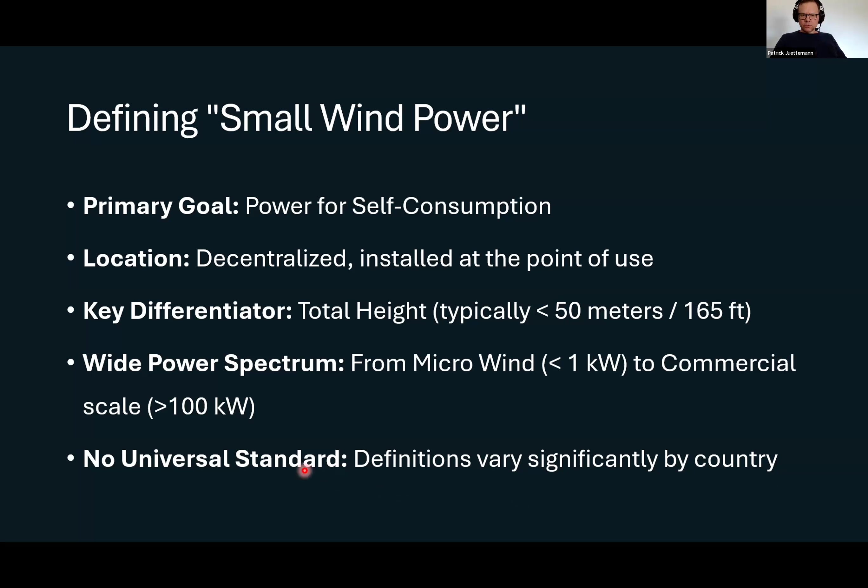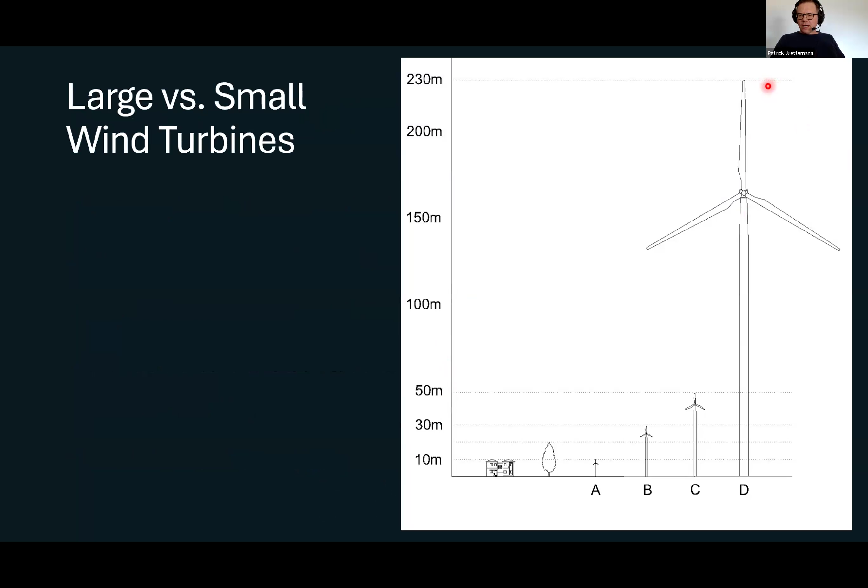So it depends on the national policies and building rules - what is a small wind turbine, a decentralized wind turbine. This illustration gives you an impression of the sizes. Here we have a modern megawatt wind turbine with a total height of 230 meters or about 700 feet. And here we have 3 small wind turbines - let's take the largest one with a height of 50 meters, and you see it seems tiny in comparison.

It's a challenging market with pitfalls, and I think it's always helpful to compare it with the solar market, because the small wind and solar market are two completely different worlds. The solar market on one side - here we have large companies worth billions. The market is consolidated. The solar cells and solar panels are mass produced in highly automated factories, which results in rather consistent quality of the products and low costs.

But on the other hand, we have the small wind market. Here, instead of a few giants, we have several hundred small and medium-sized manufacturers across the globe. They produce in smaller series, which naturally leads to higher costs per installed kilowatt power. The result is vast differences between the products - you find huge variations in technology, build quality, and storm safety. This means not every small wind turbine on the market is storm-proof, reliable, and recommended. So as a key takeaway for the buyer: beware.

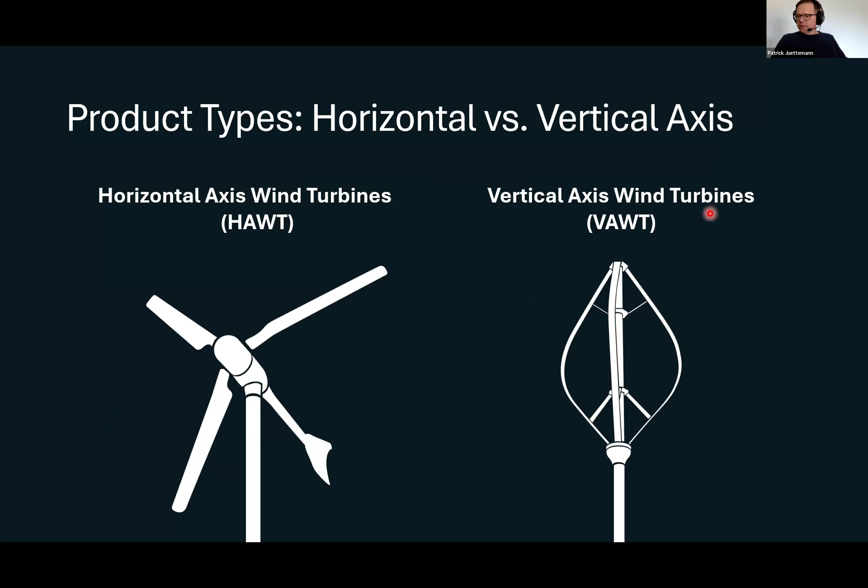Which products are those? Well, when you browse the markets, you see a lot of different designs, and most of them fall into 2 categories: horizontal axis wind turbines and vertical axis wind turbines, depending on the rotor axis.

Let's first have a look at the horizontal axis wind turbines. This is the industry standard. Here we have to say this is the most aerodynamically efficient design, they can capture most energy for a given rotor size. This is a mature, proven technology that dominates the global wind power market, both large and small wind turbines.

Then, especially in the small wind power sector, we have the vertical axis wind turbines, which is rather a niche player. They are often praised for their unique aesthetics and are often marketed as being very quiet. However, they have an aerodynamic disadvantage as one side of the rotor moves against the wind, and this limits their efficiency. So I would say, as a key takeaway, state of the art are the horizontal wind turbines.

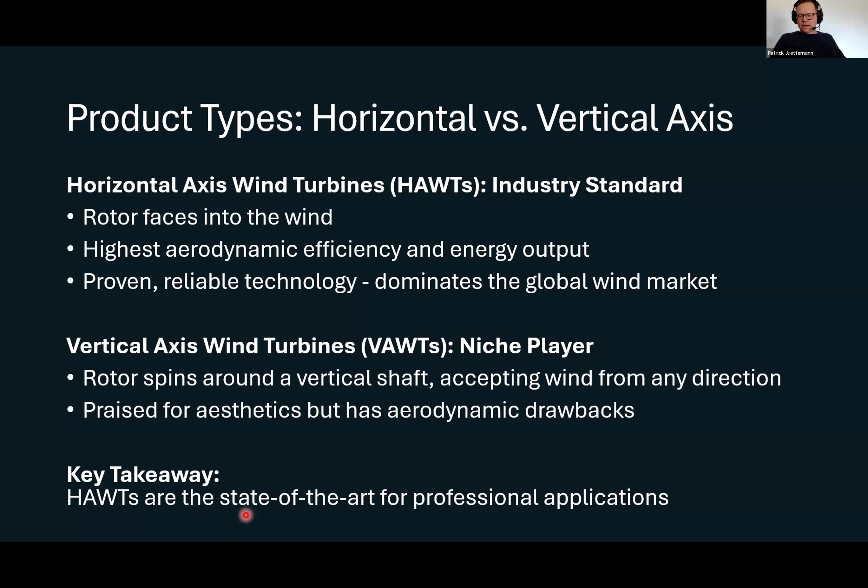When you look for a wind turbine for professional applications, now we're going to show some typical applications: a micro wind turbine, a private wind turbine, a small wind turbine, and a commercial turbine.

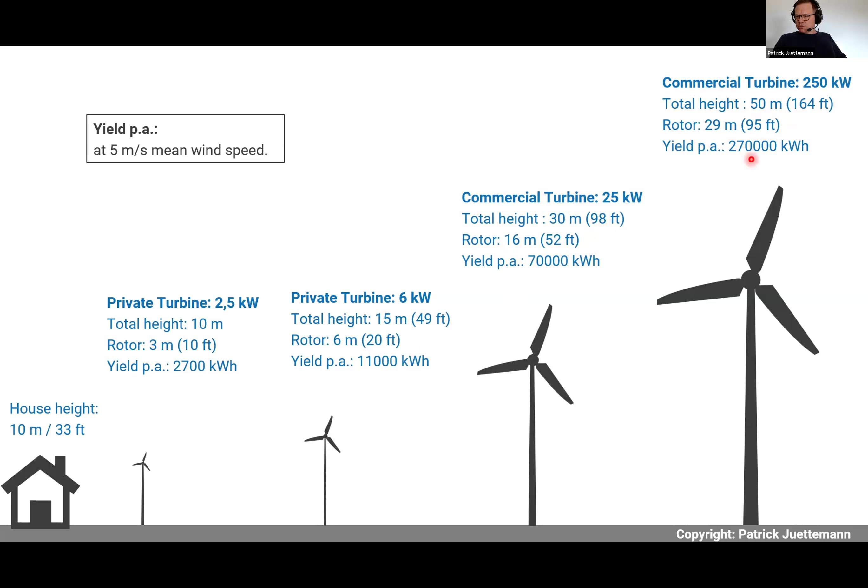So how does it work? A manufacturer startup launches a turbine with bold marketing, claiming their game-changing turbine will outperform everything else on the market. How do they look like? Most have a very unusual rotor shape. They're often vertical axis wind turbines, sometimes also for urban areas.

Then we have the problem that there's amplification on social media. You find, for instance, on YouTube, clickbait videos with sensational titles like 200% more power or 200% more efficiency, generating millions of views, but creating a completely distorted picture of the technology, as I believe.

What is the reality? I'm observing the market now for 15 years, and almost every month a new type comes on the market. But if you follow the development of those manufacturers, you see they leave the market. So the claims are not proven, so to say. And the buyers of those turbines, they had a bad investment.

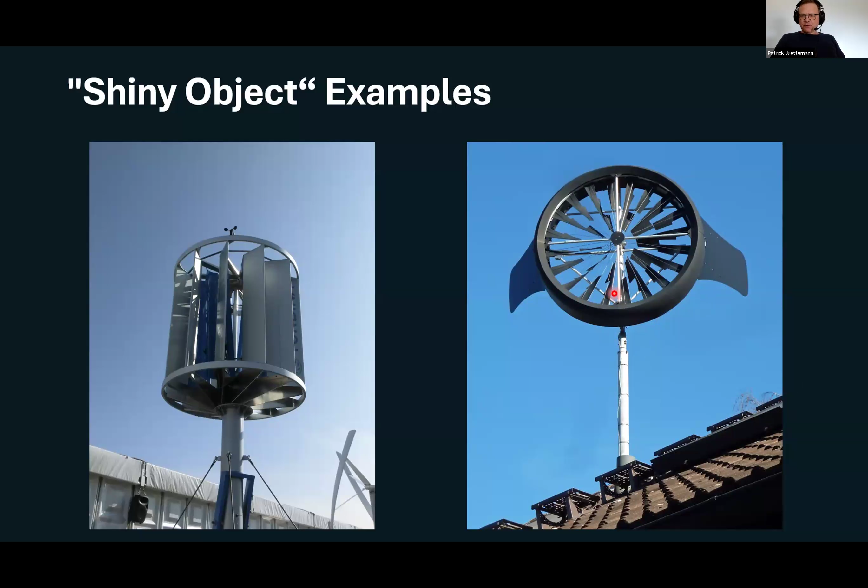So please be careful. The key takeaways are: it's a challenging market. We have many manufacturers with varying quality. Stick to proven technology - those are generally horizontal axis wind turbines. That's the industry standard. And be skeptical concerning the shiny object syndrome.

Very important: check your site first. Always assess your wind resource and be very careful in residential areas, because they are often not suitable because of low winds. And the ideal use case for on-grid small wind power are companies with high electricity consumption.

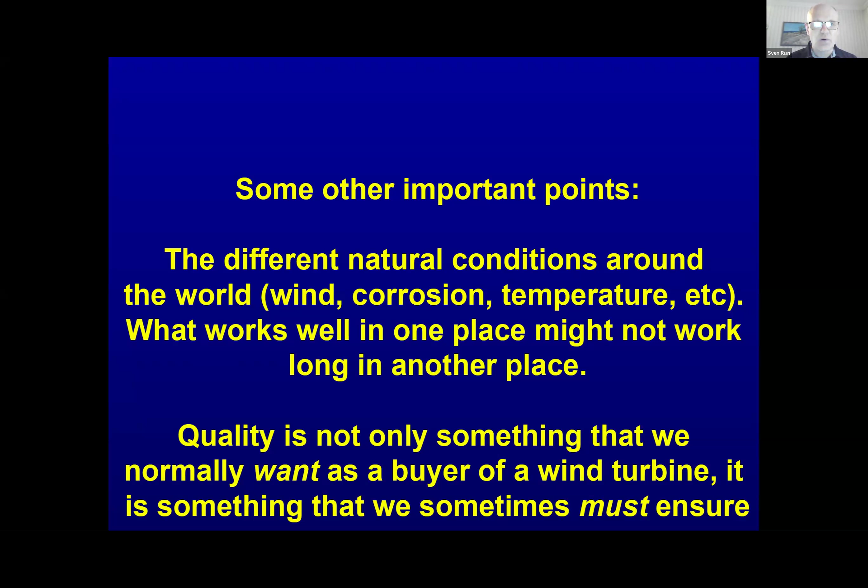The idea here is that the floor is to fulfill mandatory safety requirements. In the European Economic Area, this would include proper CE marking.

On other markets, there would be other mandatory safety requirements. The next step could be to carry out proper type testing regarding power performance and noise typically. This would be documented in a test report, and for small wind turbines, the IEA consumer label can display test results in a condensed and comparable way.

Going further, even better is if you also have third-party type certification. That means the type of wind turbine is certified by an accredited certification body to a certain standard. This involves not only some testing, but also a design review and more.

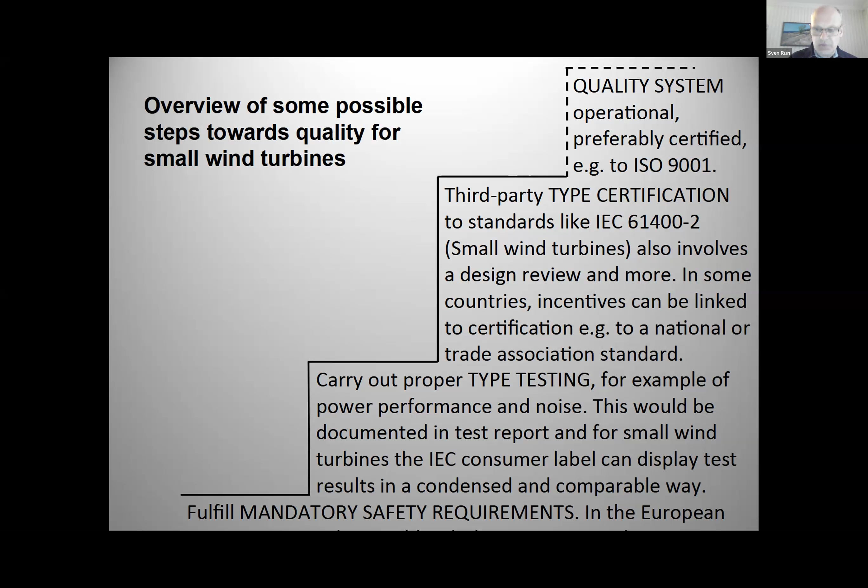And this can be linked to incentives. And then I have in this presentation added another step about quality system, because the small wind turbine industry is not quite there yet, but it would be desirable to go there, and that's to have a quality system for the manufacturing, for example.

Regarding this top step, a quality management system can define a structured way to meet expectations. For example, how to handle different versions of the product can then be described in a quality handbook. And if you're certified to this standard, the certification body will sometimes inspect that you follow your procedures for this. But as I said, we are not there yet.

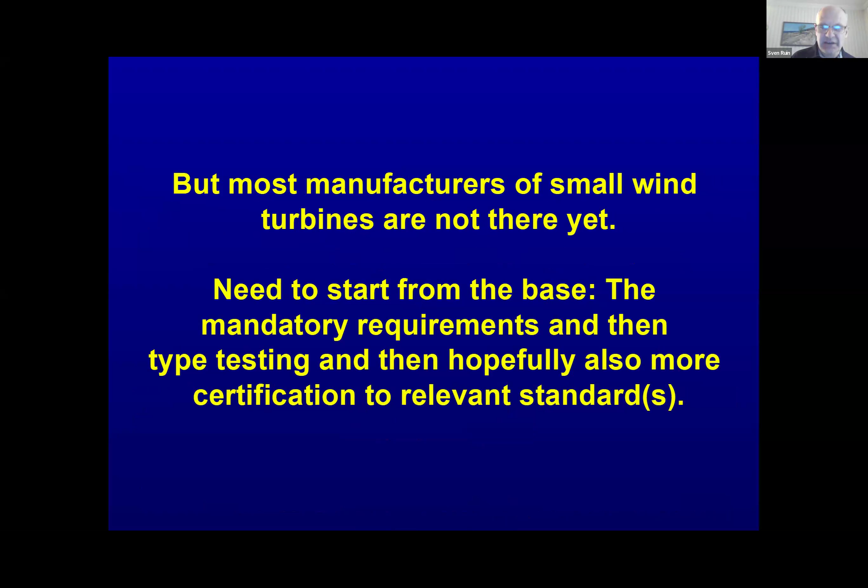So I think we need to start from the base, the mandatory requirements, and then type testing, and then hopefully also more certification to relevant standards.

This presentation uses Sweden as an example. We are part of the European Union, so most of what I say would be applicable to the EU and also other countries like Norway, which are part of the European Economic Area, using the same requirements.

Here, when you build something, the commissioner of a building project is responsible for technical workmanship and review of the design. How can this responsibility be handled? It's not practical for every buyer to start reviewing all the drawings of the manufacturer, for example.

And that's where this third-party certification by an accredited certification body comes in as a very useful tool. So if they have done this review and that is trusted, then it's a way of fulfilling this. And this is the standard procedure, I would say, for large wind turbines.

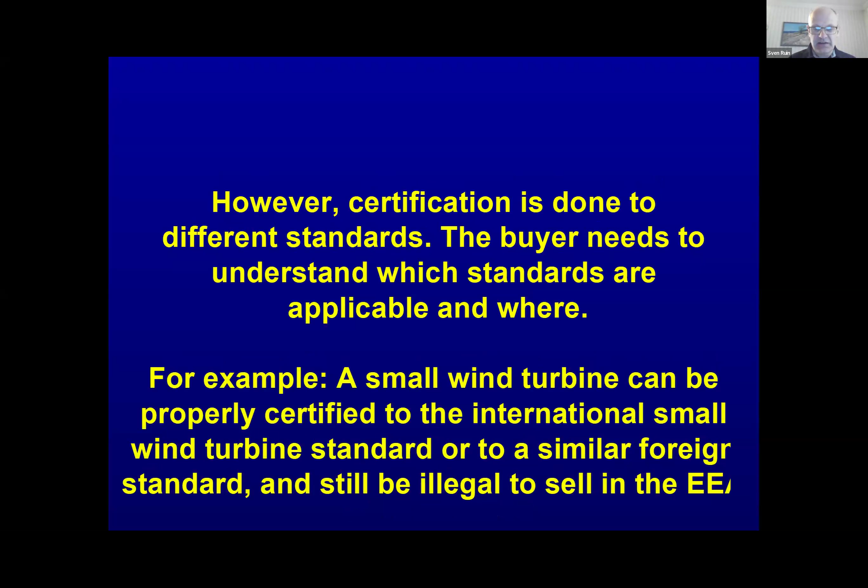However, certification is done to different standards. And therefore, we can have this strange situation that a small wind turbine can be properly certified to the International Small Wind Turbine Standard or to a similar foreign standard, and it can still be illegal to sell in the European Economic Area.

The problems that I often encounter with CE marking of small wind turbines are first, practical problems, like the braking system does not fulfill the European Machinery Directive. But also the documentation does not fulfill requirements or is not available. So you can have a great turbine which works well, but if the documentation is not there, it would still be illegal to use.

Also, please note that I'm writing CE marking. This is not normally a certification done by a certification body.

Now, there are different approaches from the industry to address these problems. The first one, which I recommend, is to fulfill the requirements. This has normally been the approach for large turbines and has worked well there. But other approaches are to ignore them, fake it, or try to change the requirements.

Coming back to the CE marking, it's a self-declaration by the manufacturer or importer. My experience is that it's difficult to do for an importer of small wind turbines unless there is strong support from the turbine manufacturer or designer. And that's not always the case.

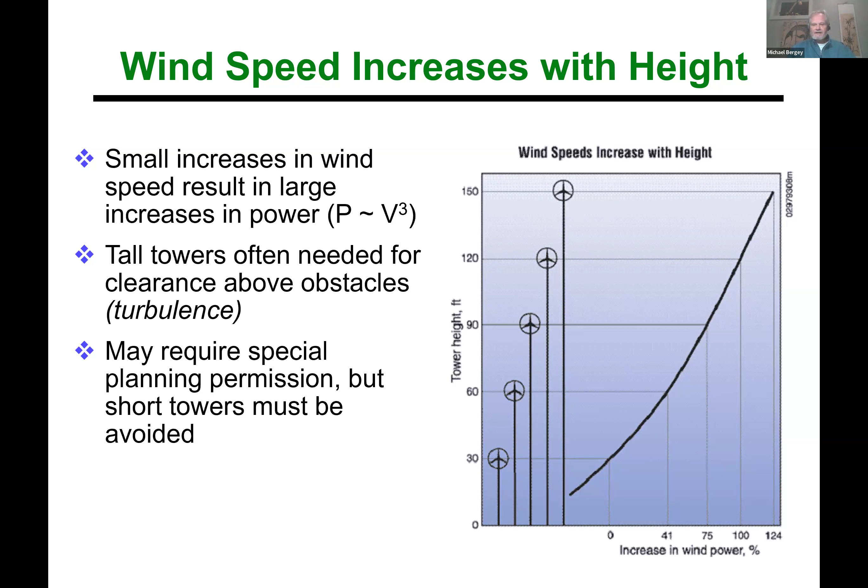I fully realize this may require special planning permission, hassles, time, investment, but it is worth the effort to make sure you put a small wind system where it can operate effectively, and that means at a proper height in most situations.

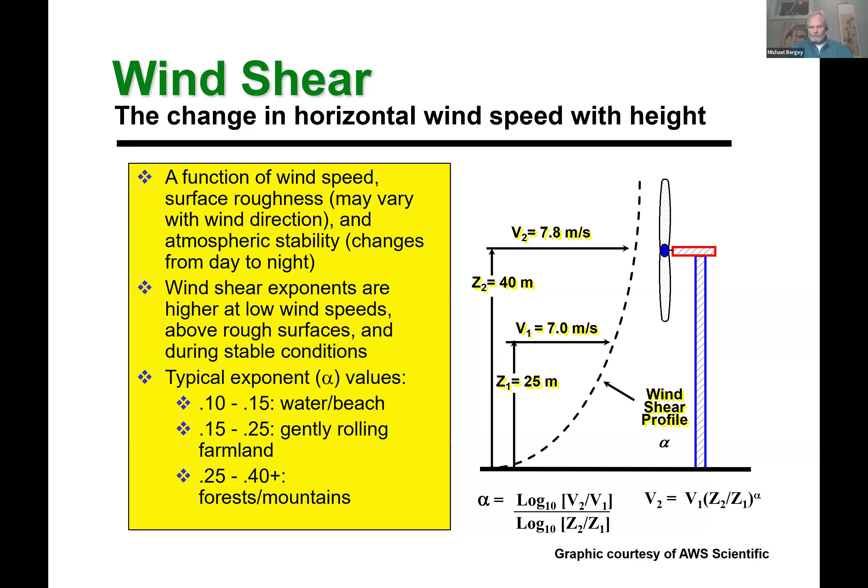There are formulas for figuring out the increase in wind speed, and therefore the power or energy available, at different heights. The math depends upon the roughness of the terrain. Wind speed increases more slowly above water, but increases very rapidly if you're in a forested area. Your dealer or manufacturer can help you understand that for your particular site and terrain.

It's very important to minimize the effects of turbulence. Turbulence is nothing more than rough air—if you fly on an airplane and the fasten seatbelt sign comes on because you're being shaken and jostled, that's turbulence. Just like it shakes the airplane, it shakes the wind turbine, and it also affects the aerodynamics, reducing performance and increasing wear and tear.

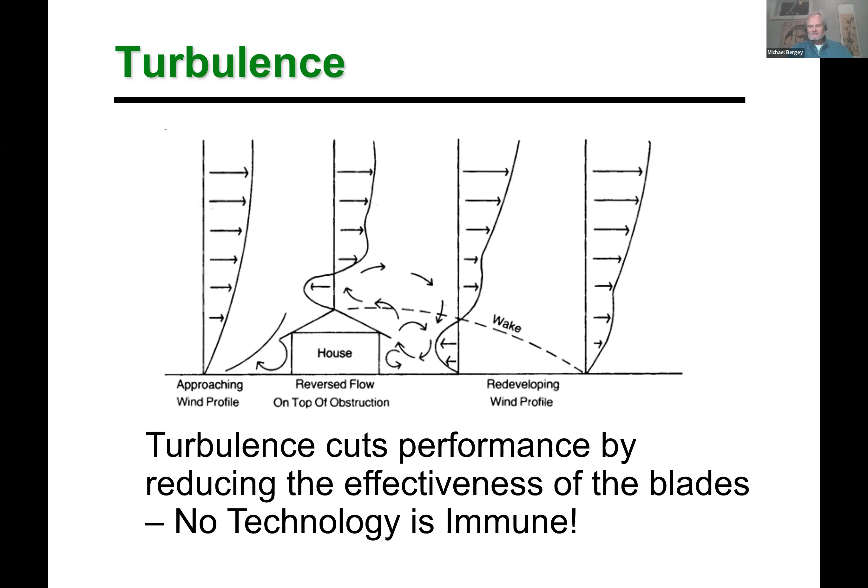In spite of some claims you may see on the internet, there is no technology that is immune from the effects of turbulence. If a wind turbine manufacturer says it's great for turbulence, go another way.

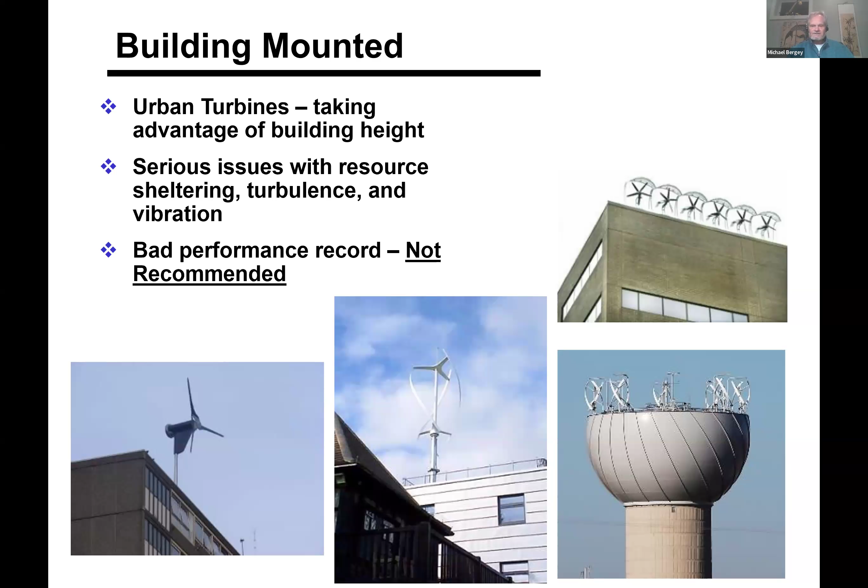There have been a lot of building-mounted small wind turbine projects, particularly in the UK and other parts of Europe, and also here in America. But these have all suffered from serious issues with poor performance, noise, and vibration. It is just not recommended—just don't do it—that's the lesson from hundreds of installations that have not done well.

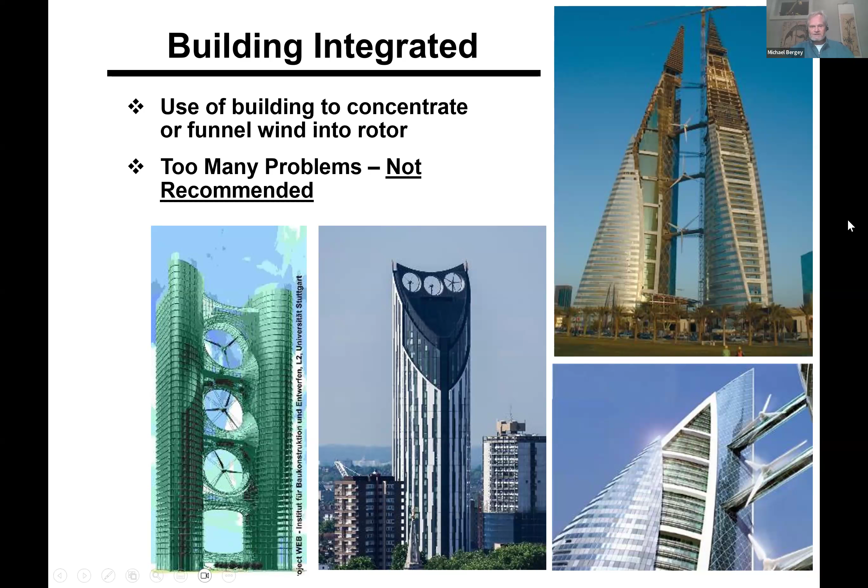Even worse is to consider a building-integrated wind system. This is an architect's wild dream—a very bad one—that should be avoided at all costs. At Bergey Windpower, we've turned down dozens of architectural firms that wanted to put our wind turbines on buildings or integrated with buildings, including the replacement of the World Trade Center in New York City. We turned down Arup, a major architectural consulting firm, because it was just such a bad idea, and fortunately we convinced them not to do it.

The takeaway I'd like you to believe is that if you're going to put a wind turbine in an urban area, you're going to suffer such bad performance that you really don't want to even measure the energy. You can do it for aesthetic reasons, for branding, that sort of thing, but you're not going to get any decent performance. So if you're going to put a wind turbine in an urban area, do it for the looks, not the energy.

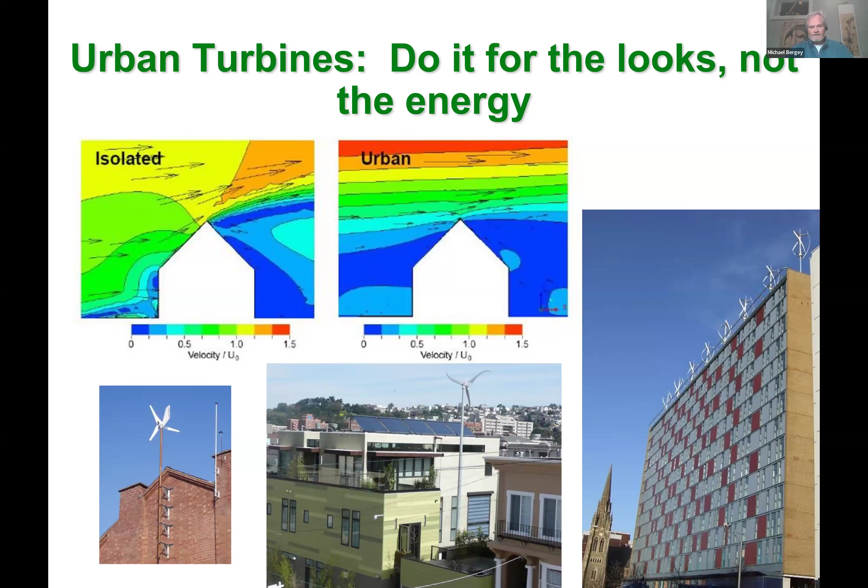So what about towers for small turbines? Here's an important way of thinking about it. If you put a wind turbine on a tower that is too short, it is the same thing as mounting a solar module in the shade. It's just not good engineering practice. You won't be benefiting yourself or that machine by putting it on a short tower in a turbulent area.

So we recommend, based upon thousands of installations all over the world, the tower should be at least 18 meters or 60 feet. Now, I understand that it's common practice in places like the UK to put turbines on 15-meter towers because that's easier to get planning permission for. But it's just not good practice, and we think it's worth the effort to get a proper height tower.

If you've got trees, you're going to need taller towers, because the tree blocks the wind and creates turbulence, and buildings do the same, so you need to be above those. Taller towers do cost more, but they nearly always lower life cycle costs because the wind turbine performance is better. There's less maintenance because there's less wear and tear due to lower turbulence, and you get a longer operating life. So please don't use short towers.

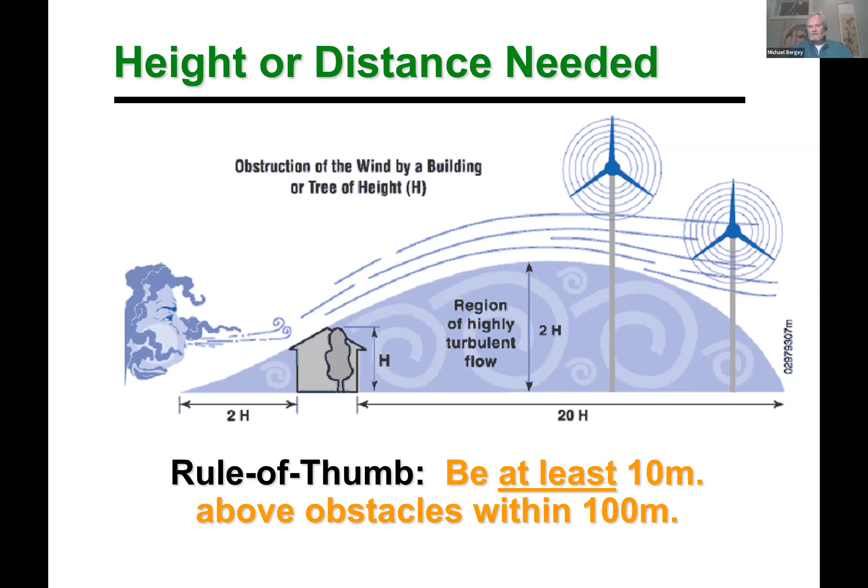What's the rule of thumb? There's no exact science. You can't see air, so you can't really measure turbulence. You can't tell where it's particularly bad. And of course, it varies with wind speed and wind direction. So the industry has found reasonable success in using a simple rule of thumb: the center line of the rotor should be at least 10 meters above any obstacles within 100 meters. You want to pay particular attention to the prevailing wind direction. So if you're, say, coastal and you have an inland-outland wind flow, make sure that the obstacles in those directions are the ones you're paying attention to.

And with that, that's how you site a wind turbine for full effectiveness. I'll be happy to answer any questions when we get to the Q&A period. Thank you very much.

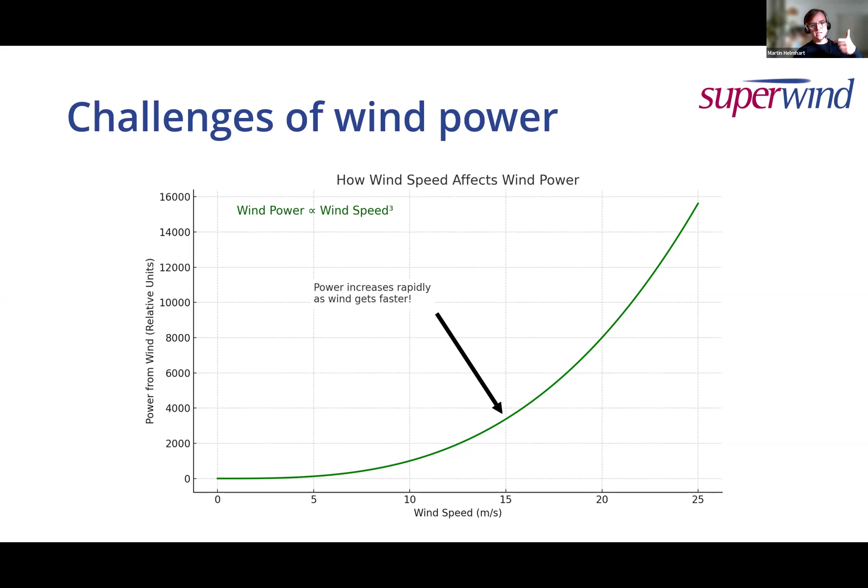As Patrick Jüttemann mentioned, it's a challenging market, so that's why we moved to niche markets where the climatic or weather conditions are really demanding - high winds, turbulent winds, cold temperatures. This is where our Superwind turbines do their job, mainly because of the design features we developed.

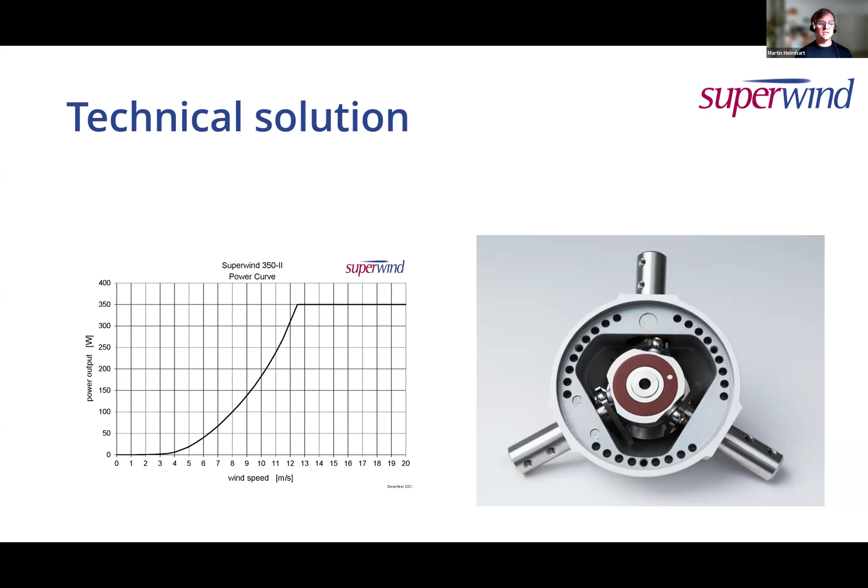So we have our wind turbines. They come with an integrated rotor blade pitch control, like the big wind turbines. That means when there's a lot of wind, they change their angle passively, so no external control is needed. This way we can keep the rotational speed steady, keeping stress on the structures low and ensuring energy production even under stormy conditions.

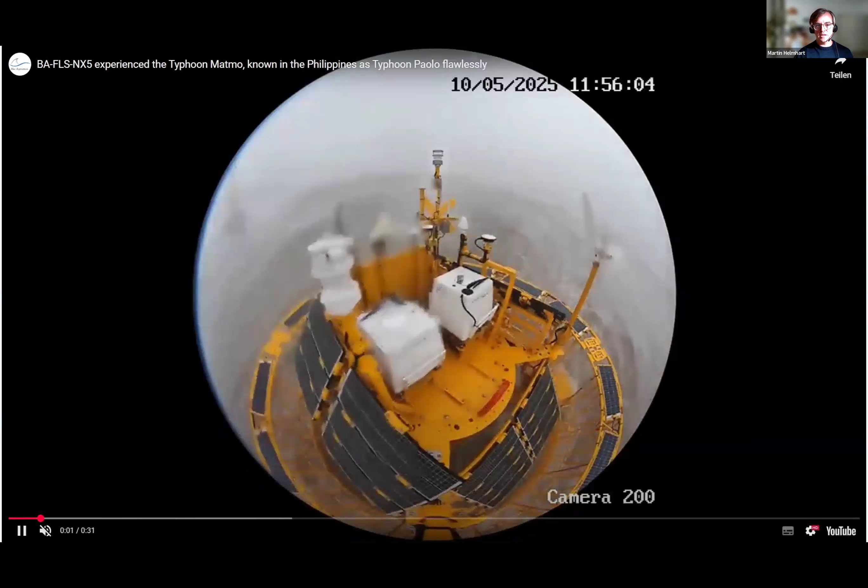One of these applications, which is pretty exciting for us, is measuring buoys in the open ocean. This is Typhoon Matmo from this year in Southeast Asia. These kinds of buoys are out in the ocean all year. They encounter water and wave impacts, as you just saw. They suffer extremely high winds, in this case up to 170 kilometers per hour, along with a salty atmosphere and water impacts.

So when we look at the markets and the growth and where it comes from, we're all aware about that. Despite the latest developments, particularly in America, there is a push for CO2 neutrality, and that is the best estimate driving incremental investment for the next 25 years of around 40 trillion. In that area, when you look at where we sit combined with the other energy forms beyond wind, the microgrid systems represent around 12 to 15 trillion.

And that's where we come in and help to solve the problem with micro wind combined with hybrid energy, so we get energy independence, security, and we use the existing infrastructure.

On that note, I would like to address the actual addressable market for mini wind turbines combined with solar and battery, estimated at around 200 to 300 billion in this period of time, growing at around 8 to 10%. So the key drivers are off-grid reliability, infrastructure, independence and security.

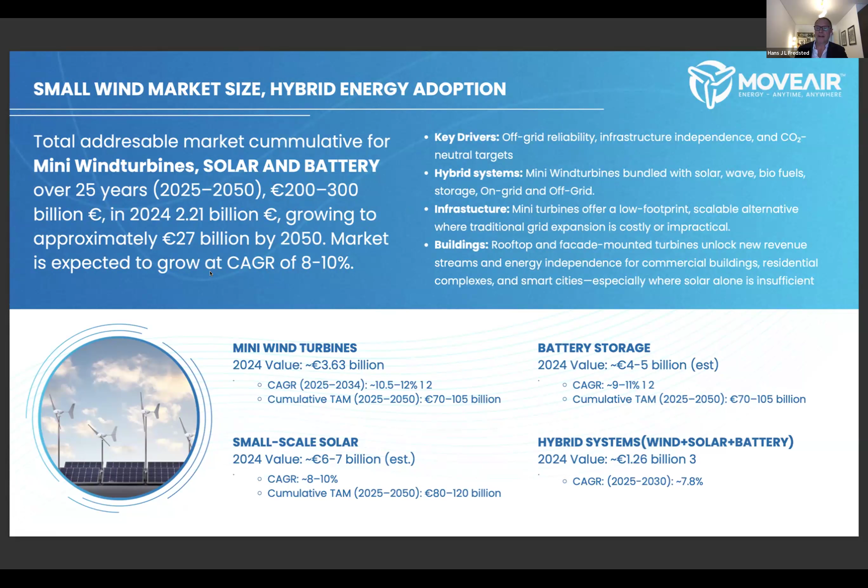With hybrid systems, you go far beyond a singular wind turbine approach to grow the markets. That's also where, with mini wind turbines, we will increase our footprint and be able to scale globally. There were early on some discussions about where you can mount and integrate and which infrastructure you can use. Yes, for sure there are challenges, but if you focus on the areas with micro turbines from 500 watt up to 2000 watt, it is feasible and manageable, and also successful in delivering good yields.

This is indeed the challenge for this industry, and has been over the years. I was told by Stefan from the World Wind Energy Association that back in 2008 at the Wind Husum Fair, there were around 14 small wind representatives there, and on top of that there were a lot of topics on the agenda and keynote speakers around small wind. Today, in 2025, there was actually only one, which was us. So what has happened with the industry? There have been a lot of cowboys out there flooding the market, as was discussed earlier, showing products that actually do not deliver, and that lack of quality, standardization and mass production is a major challenge for the industry.

On the other hand, this is also our opportunity. So that's why we need to collectively build engineering standards for approvals to get on the market in a way that will actually increase the quality, and furthermore work together on automation and standardization of production at mass scale, so we have the quality that can enable us to grow globally.

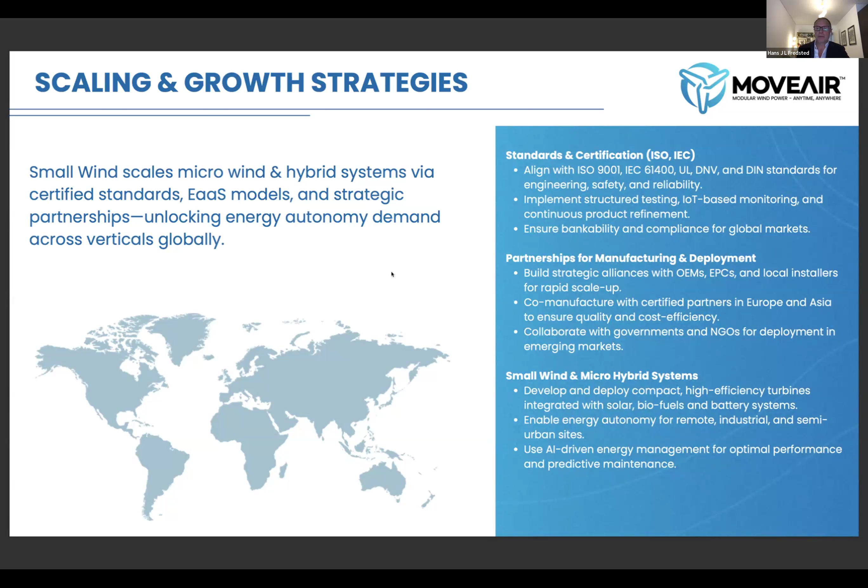Furthermore, what's needed and essential for scaling is partnership across the globe on manufacturing and deployment—co-manufacturing with certified partners in Europe, Asia, America. When we talk about small wind, we're putting our efforts, time, money and investment into building small wind together in micro hybrid systems integrated with solar, biofuels and battery systems. That is where the future lies and the opportunity for us.

So obviously the role of WWEA, as with other organizations, is that you have to promote supportive policies and help us with funding and community and energy models that will work and can be scaled. As spoken about before, the harmonization of the market, in addition to having very good, solid, founded innovation hubs for development. On that level, we can achieve energy autonomy, scalability, and hybrid resilience across the globe.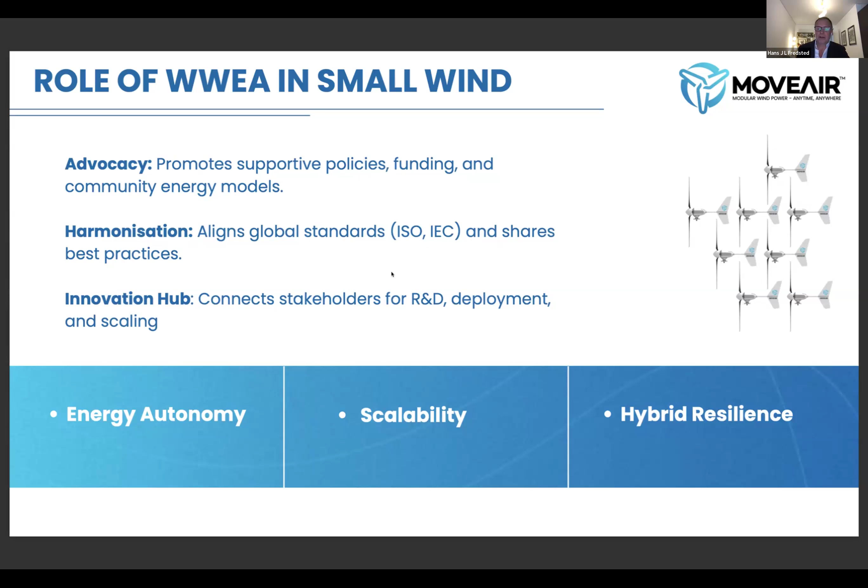So this is just what we are doing and how we are developing to empower energy demand, where we focus on decentralized systems, integrated systems, smart financing from converting CapEx to OpEx or sale-leasebacks, and leading in this environment with hybrid integration, also moving towards energy as a service.

So that was what I had on that slide. I can show you one more—just an example of a solution to a client where we looked at it. Obviously this is an illustrative graphical image, as was spoken about before. The tower would have to be much higher, but this shows where you build mobile units or integrated units combined with all the energy forms.

You see also, based on this example, when we talk about energy efficiency for specific sites, there's a saving of up to 20,000 euros a year by running at a high full 24/7 kilowatt hours every hour.

So that was all from my side. Here at the end, I'd like to say that the 20th century was built for grids, and in the 21st we will build swarms. Together as the small wind community, with this swarm, we will also enable energy freedom in the world.

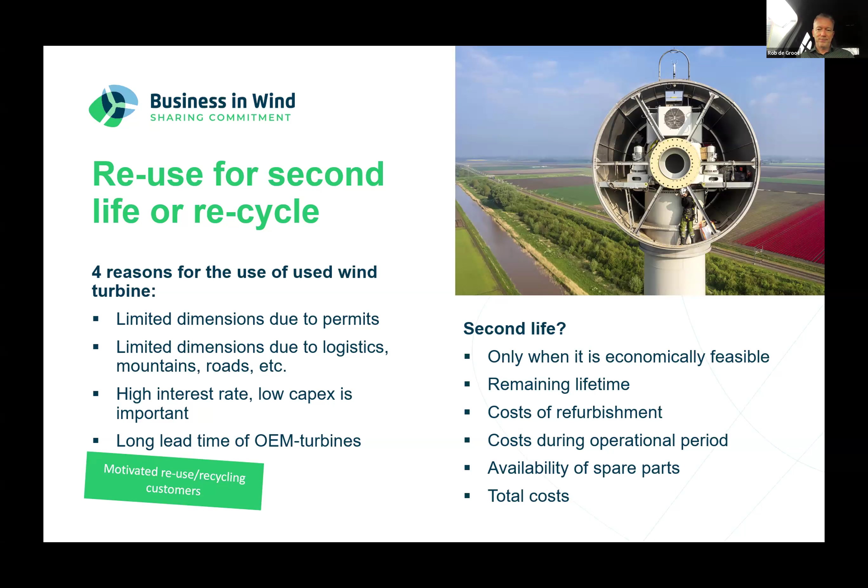So a little step back to the scope. This is the complete scope we cover. So if somebody knocks on our door and says, we've got turbines that might be interesting for you, we start with an inspection. Based on the inspection, we can determine whether we want to buy them or not, and what we need for refurbishment. That also determines a bit of the budget and the price that we want to give for the turbines. Then we dismantle them.

We don't have our own dismantling crew as such, but we work together with crane and transport companies to do the dismantling. We have our own site managers, our own project managers.

Sometimes we sell the turbines as they are to people that want to give them a second life elsewhere. But sometimes we have full installation projects for which we have to do the refurbishment, sometimes even the civils, the foundation, installing the turbine, and commissioning them. So we split our scope basically into a buying and a selling side of it.

Then we commission the turbines, and then we hand them over to a maintenance company that takes care of the rest of the life of the turbine.

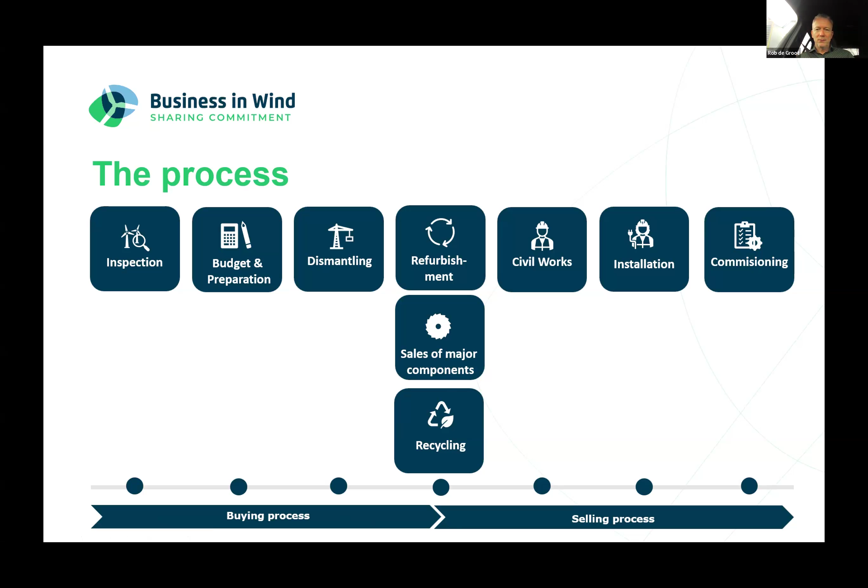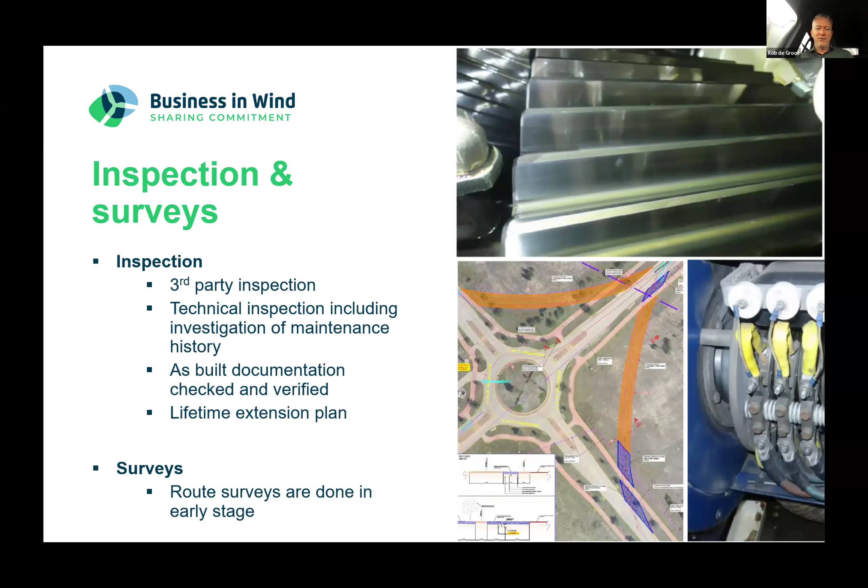As I said, we always start with an inspection, especially with gearbox turbines. We do that with endoscopic research as well, but also the site itself is part of the survey, to make sure we can get away with the stuff, etc.

Logistics is very important. You can go for the cheapest carrier, but we work with a company we've worked with for 20 years already. As Wim has been in the business for 20 years, you better have a smart, good and reliable carrier than a cheap one, and thereby you can come up with solutions like 2 blades on 1 truck, etc., which saves you much more cost than just going with the cheapest one.

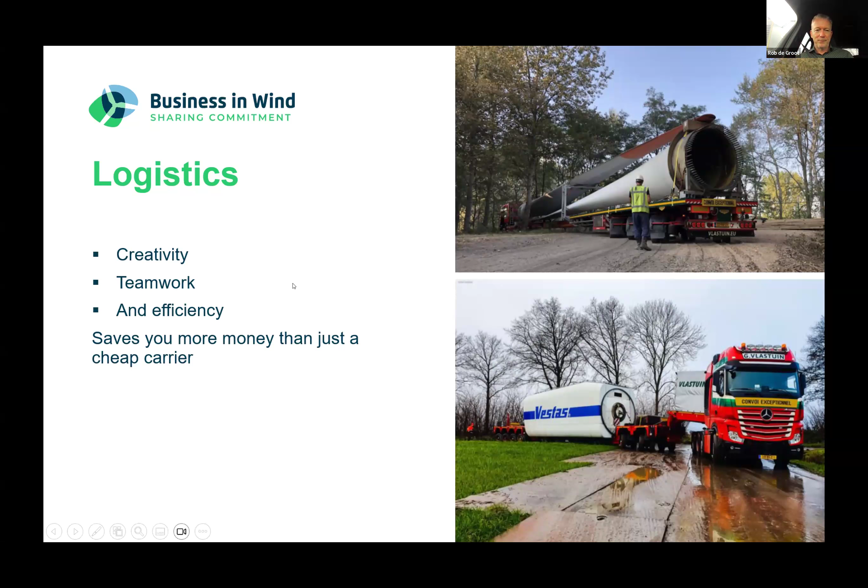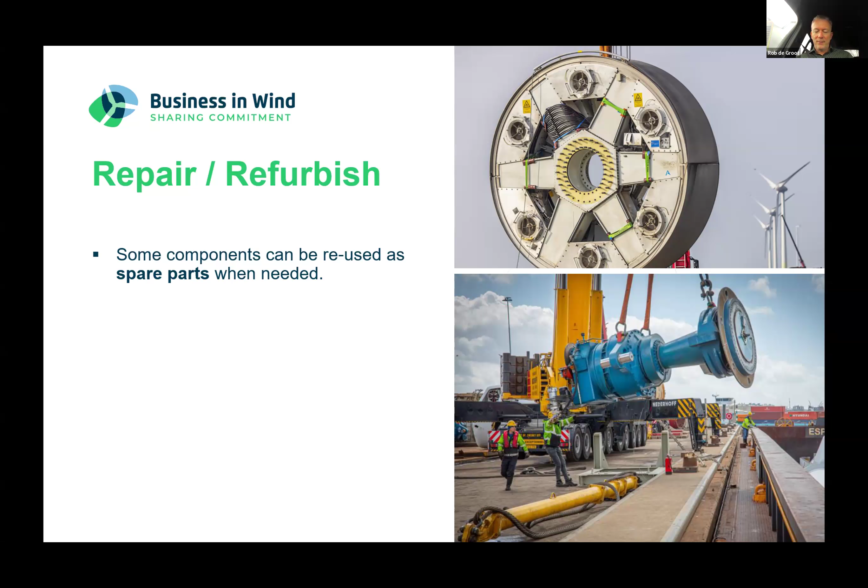Sometimes we take turbines apart and repair, refurbish parts, and sell the parts as such. That's an increasingly important part of the business that we do. So not only selling the turbines as a whole, but also the individual parts, as you see them here. They can also be smaller parts like skid packs or all kinds of imaginable stuff.

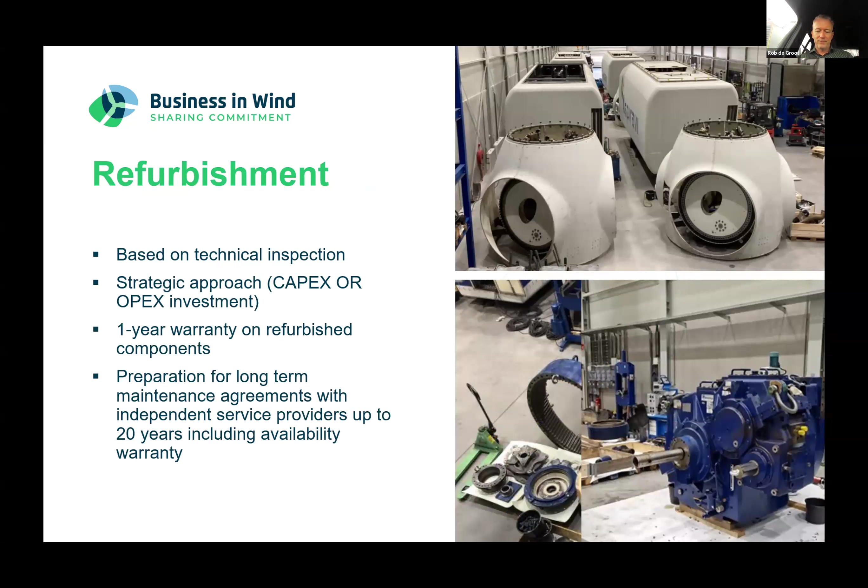Since September now, we are in our new facility, so we can do the refurbishment ourselves, based on the inspection, but also based on the customer's wishes on what they want to have refurbished. And we warrant that refurbishment work, of course.

Some specials that we've done: some burned turbines, which is always tricky with hoisting. And we did a very special project on Ascension Island, where we had to take down some old turbines and build one new EWT turbine. Ascension Island is in the middle of the Atlantic, between Angola and Brazil, so that was a very special project that we've done.

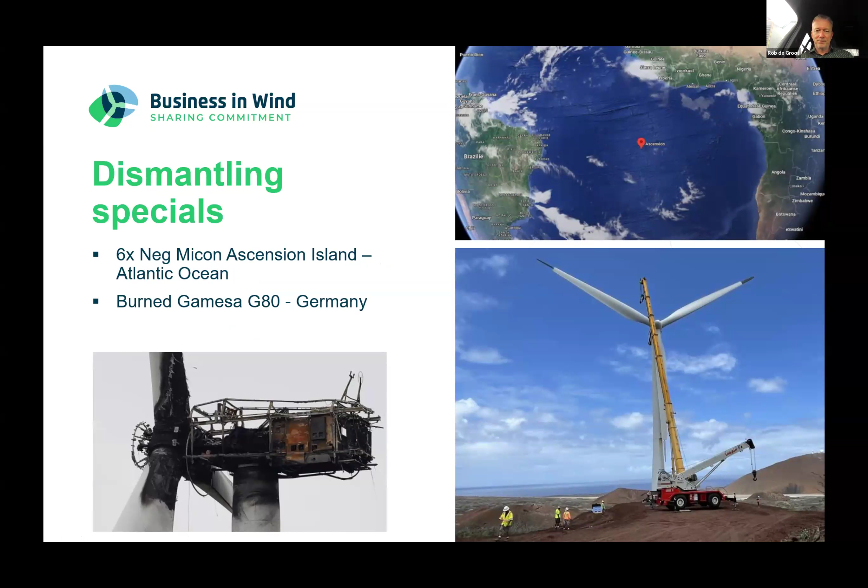Now we have our in-house workshop, where we can refurbish turbines close to where we are. We are actually developing a demolition robot for concrete towers.

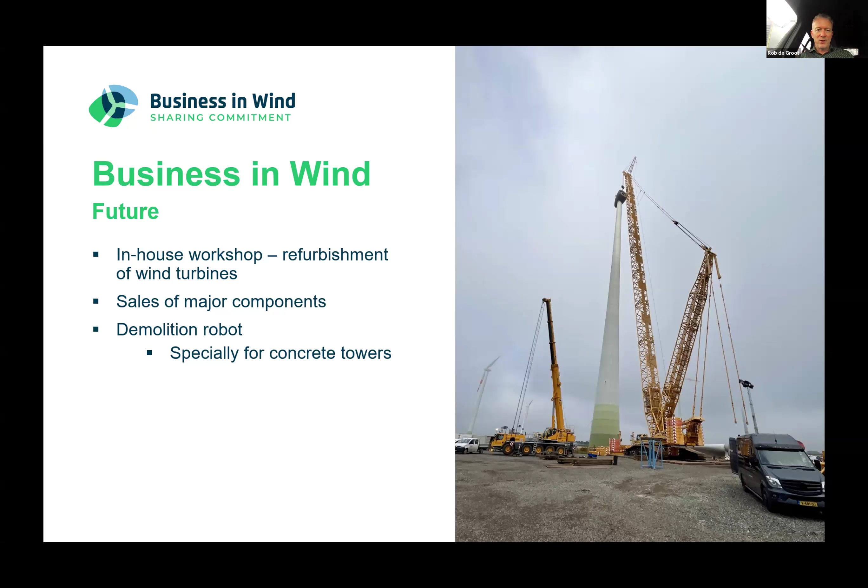Currently, many of these concrete towers are demolished with a wrecking ball or with dynamite, which in many cases can't be done because it's in busy areas, or because farmers don't want all the concrete debris left in their land. So we're developing this demolition robot that should nibble down the tower to a level where you can finish the job with a very cheap, low crane. That's something for the future.

Of course we don't want to reuse them just as such, but we wanted to inspire people by doing this with a turbine, so that you can think of all kinds of different applications, giving turbines or turbine parts a second life.

So that's the quick version of what I wanted to present. Are there any remarks or questions or anything else?